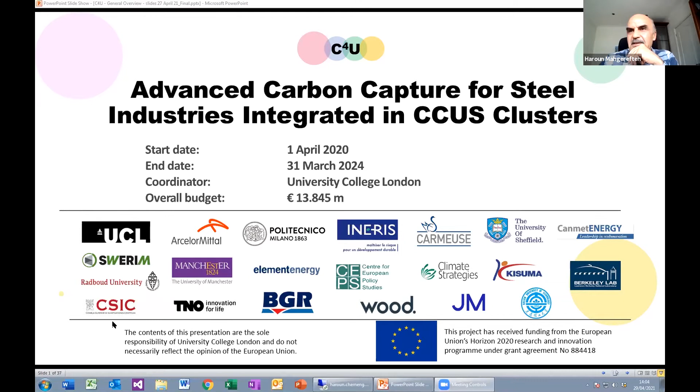So moving on, C4U, the challenge: why is capturing CO2 in the steel industry important? Well, I hope when I finish reading these four bullet points you'll see the reason. First, the iron and steel industry represents the largest energy consuming manufacturing sector in the world, with average specific emissions being 1.83 tons of CO2 per ton of steel. It's remarkable, you produce more CO2 than every ton of steel, almost up to 1.5 to 1.8 times as much. 1.8 gigatons of CO2 were emitted in 2018 from the iron and steel industry, up by 4.6% compared to 2017, accounting for up to 8% of anthropogenic CO2 emissions. That is a huge amount when you think about the total.

So it has been widely recognized that reducing CO2 emissions from the iron and steel making industry is considered to be one of the 5 pillars in meeting the net zero emission target. You have to reduce CO2 emissions from the steel industry in order to have a realistic chance of hitting net zero targets by 2050 or 2030, depending on which country you're dealing with. So it's a question of not putting all your eggs in one basket. You need to pursue, like with COVID, you can't just rely on one vaccine. So you need a range, and much the same goes with capturing CO2 from the steel industry. You've got to pursue different promising capture technologies in order to capture CO2 from the steel industry, and at the same time make sure it is, of course, at minimum cost and energy efficient, whilst also taking on board the socioeconomic barriers.

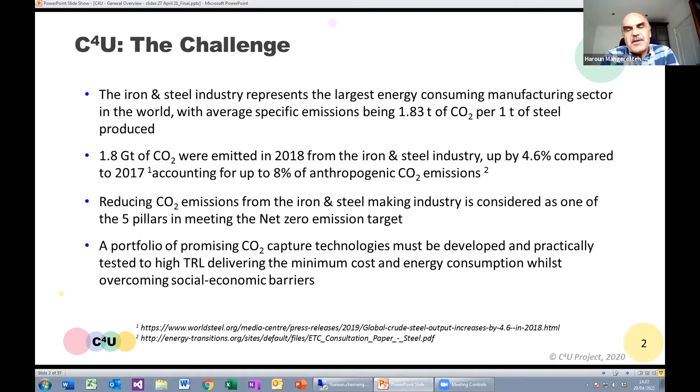So main objectives: as Paul said at the beginning, we have 2 promising capture technologies that have shown quite a bit of promise, and these are both solid-based. We'll hear more about them later. We need to raise these to a high TRL level. They are called DISPLACE and CASOH capture technologies. We need to analyze the environmental and business impacts for the integration of these 2 technologies at large scale in the ArcelorMittal plant in Gent as part of the North Sea Port Industrial Cluster.

So this is where we are focusing on, this is the industrial cluster. We have several industrial emitters, the main one being the ArcelorMittal plant in Gent, and this is where we would like to integrate our capture technologies to this plant.

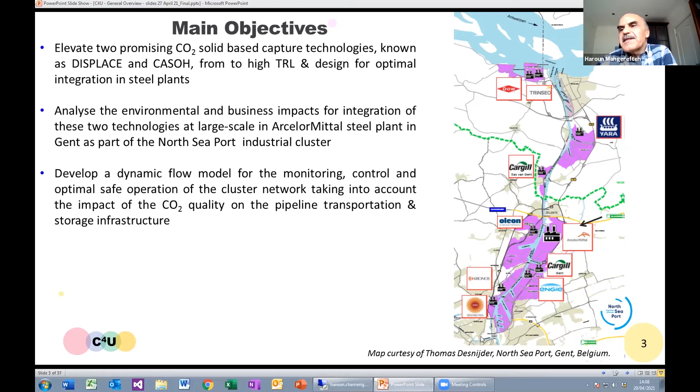As part of this industrial cluster, we need to also develop a dynamic flow model for the monitoring, control, and optimal safe operation of the cluster network, taking into account the CO2 quality impact on the transportation and storage infrastructure. So it's not a standalone situation where we are just considering capture and transport from A to B. We are working in the context of an industrial cluster, using our North Sea Port Industrial Cluster as the main focus of our attention.

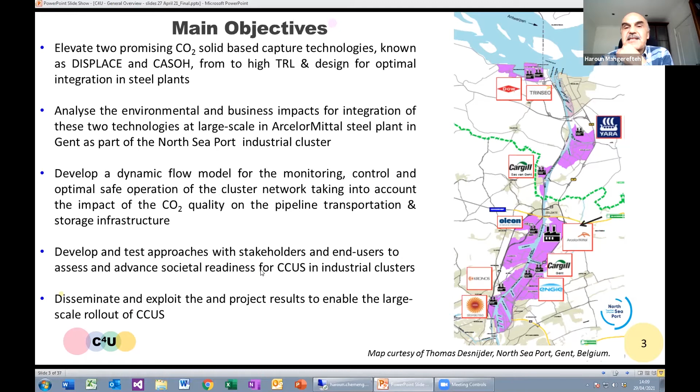We need to test and develop approaches with stakeholders and end users to assess societal readiness for CCUS in industrial clusters. It was one of the main requirements of the call, and if you look at many of the calls coming up for CCS, you've got to have that on board, because if you don't have society on board, then you have problems. And, like many other projects, we disseminate and exploit the project results.

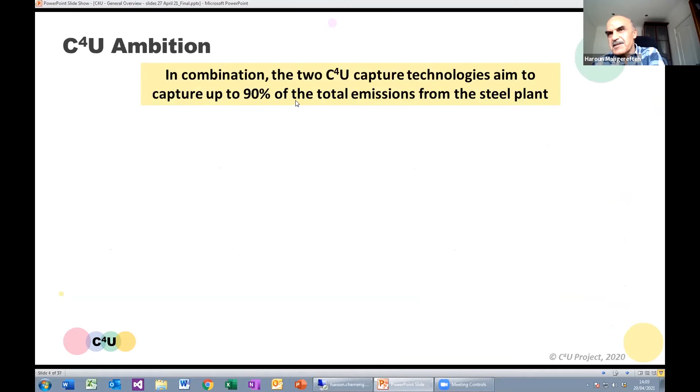What is unique with our 2 technologies is that together they will capture up to 90% of these CO2 emissions, which have different heat values, different compositions, different specifications. With the 2 C4U capture technologies, we hope to capture up to 90% of these, and therefore have a major impact on reducing the CO2 emissions from the steel industry.

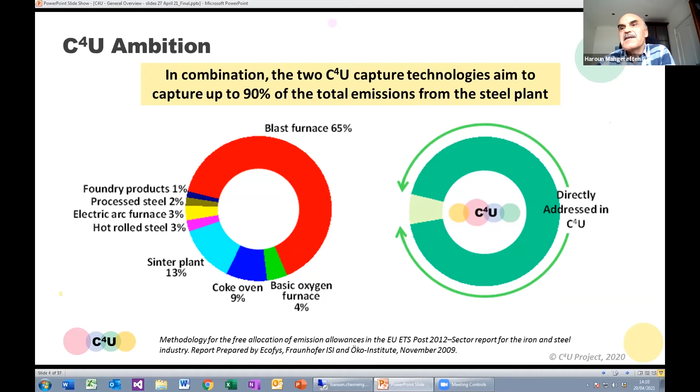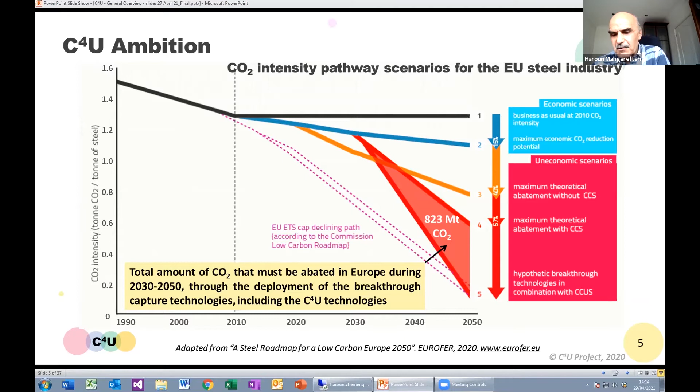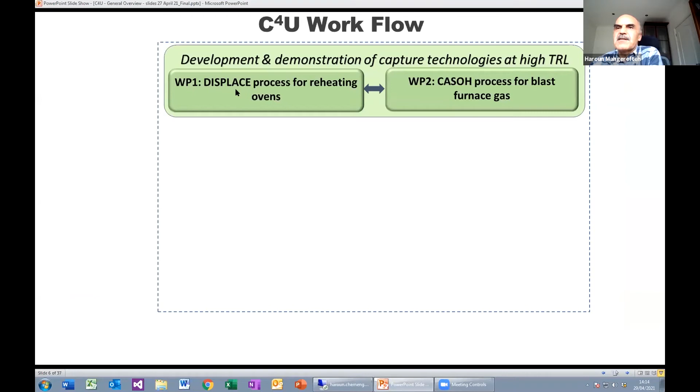Work package 1 and work package 2, the work on elevating the TRL level for the two capture technologies, DISPLACE and CASOH. You'll hear about those more later.

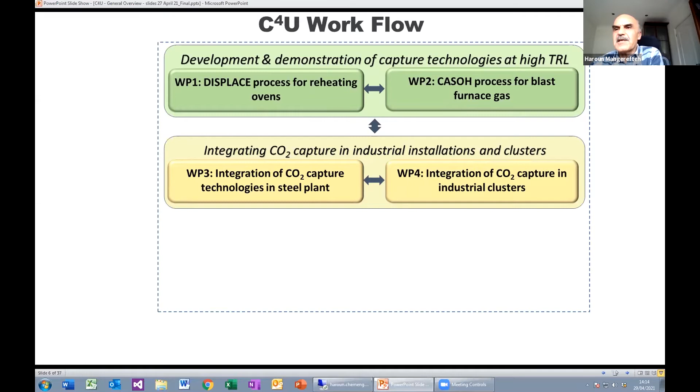In the next work package, we integrate these CO2 capture technologies that we've demonstrated into the steel plant and also in an industrial cluster. Our main focus is the North Seaport Industrial Cluster. And of course, we need to consider societal readiness, public policy, and business case.

So societal readiness and public policy, what needs to be done to make sure that we have public on our side. That's work package 5.

And of course, we need to have appropriate business models to entice business, different models to make sure that we try and make these CCUS clusters commercially viable through the development of different business models.

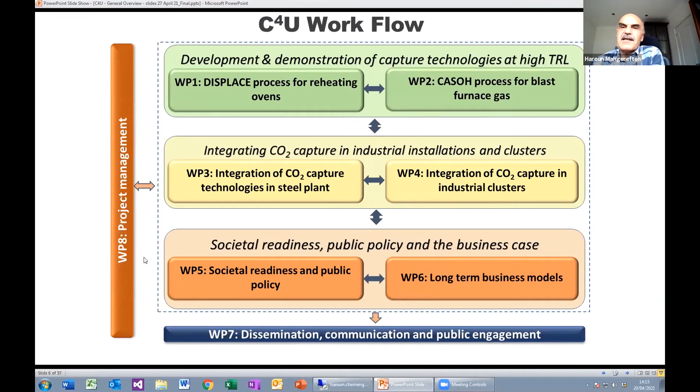And like many of these projects, we need to effectively disseminate and communicate our project results, and work package 8 involves the project management.

I'll now move over to pass to Paul Cobden, where he can talk about the two capture technologies, and I'll take over from him after. Over to you, Paul. Thanks, Haroun.

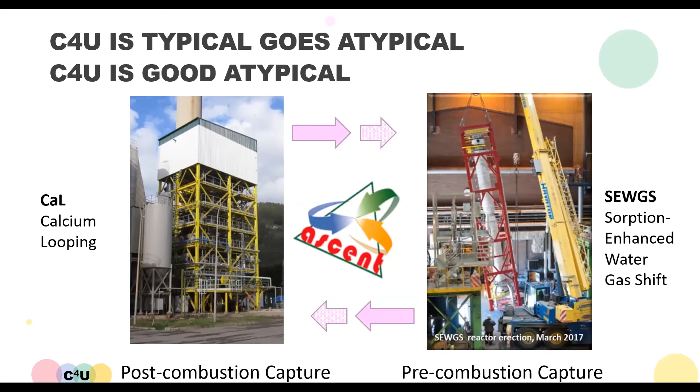If we look at where we're going to be performing these demonstrations, the idea here is because we're asking for high TRL demonstration in the call, we have to be associated with large scale facilities. So in Asturias at the ArcelorMittal plant, we'll be building the CASOH technology, which uses calcium copper as the base material.

4,000 kilometers away, which is where I am, and this is the current temperature profile. So it's quite good today, but it can go up to 1 degree per 100 kilometers in the middle of winter when it gets down to -30 here, and it's still 10 degrees C in Asturias. Today it's 3 degrees in Luleå, and there we're developing the DISPLACE technology.

This is where the blast furnace is, and you see this little line. This is a 2 meter wide diameter pipe taking the blast furnace gas from the blast furnace there, and we have a small port in there taking around about 1,000 normal cubic meters an hour of blast furnace gas to the demonstration site.

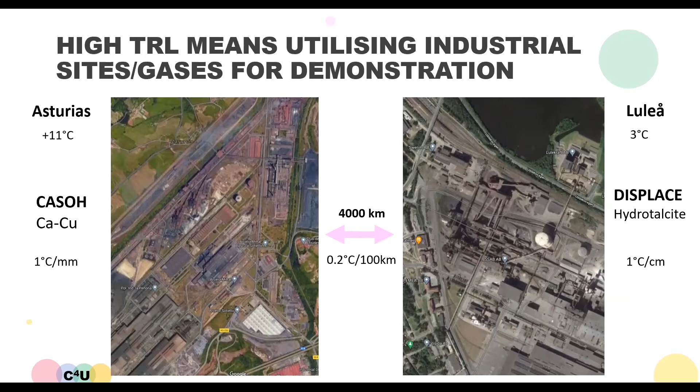And the reason I talked about the temperature gradient is because I think our two technologies are also very much defined by a temperature gradient. In the CASOH process, we're talking about up to 1 degree C per millimeter, and in the hydrotalcite process, it can be more like 1 degree C per centimeter. Of course, a very different scale than the weather phenomena.

So the status of our pilot preparations is we started just over a year ago, and both of the pilots have similar activities. They're both going to show more than 2,000 hours of demonstration at high TRL. And most of the activities of this year are still on engineering, procurement, construction, etc.

Both of the technologies have already delivered on their basis of design. Special attention was paid to equipment delivery, getting everything in on time, the mass balances, the operational philosophy of the pilot, and all of the responsibilities. Unlike some research projects, because we're aiming at a very high TRL level, we can't afford to let anything go wrong.

When we program for a campaign, that means we have to have up to 40 people running around, running the campaign, doing 24/7 work. We can't have the possibility that some material is not delivered and therefore everything will be still. So a lot of extra work compared to a typical research project, where if you don't get a material, you can do something else and you're not relying on tens of other people to run the project. It works in a different way.

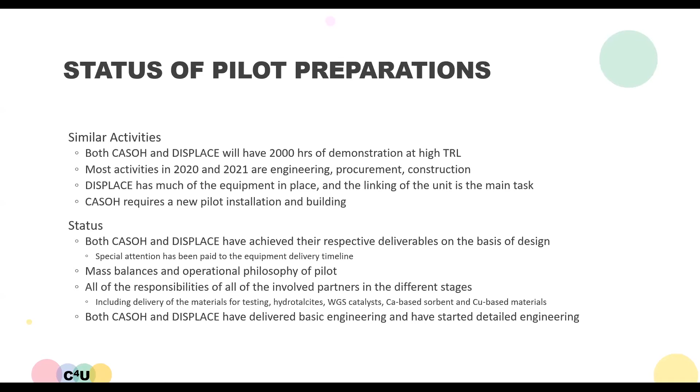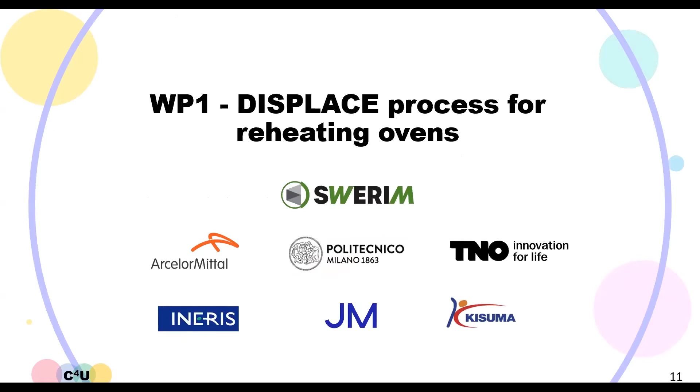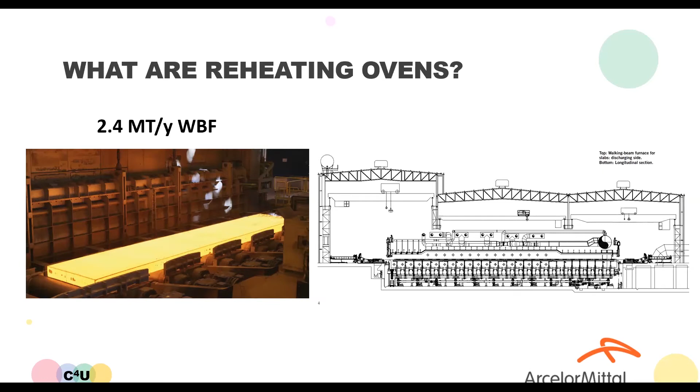It's only about 2 or 3% of the CO2 output of the steel plant, but it's one of those sources that needs to be thought about in terms of how to decarbonize. It can be done in two ways: you can decarbonize the gas that you burn going into the oven, or you could decarbonize the burnt gas with the CO2. So both pre- and post-combustion options are actually going to be looked at in this project.

Here are two much smaller furnaces which are going to do the two 1,000-hour campaigns. On the left-hand side you've got something called a chamber furnace, which typically has 800 kilo samples in it. On the right-hand side you've got a walking beam furnace, which can process up to 3 tons an hour of steel.

The two campaigns are: one in which we use the technology to first decarbonize the CO2, so pre-combustion, and the nitrogen hydrogen is used in oxy-combustion in the furnace for heating the metal. On the right-hand side, in the walking beam furnace, we'll take the blast furnace gas directly, do oxy-combustion on it, and then remove the CO2.

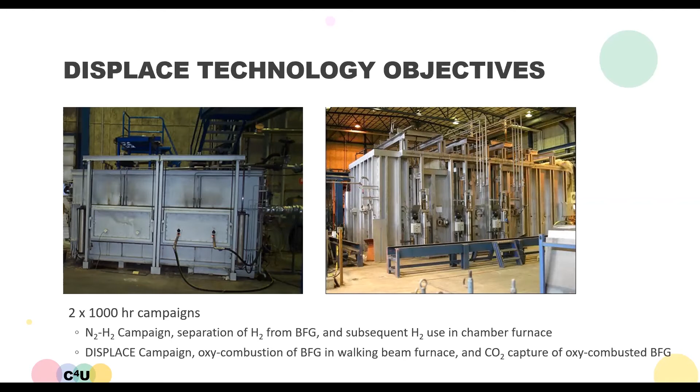The heart of the process is the technology shown here. This is the pilot as it already exists today, with a water gas shift catalyst, which is important for the nitrogen hydrogen campaign. We've got this 10-meter column, about 60 centimeters in diameter, containing up to 3 tons of material, which can be used for CO2 capture both from the nitrogen, the blast furnace gas directly, and also from the combusted blast furnace gas.

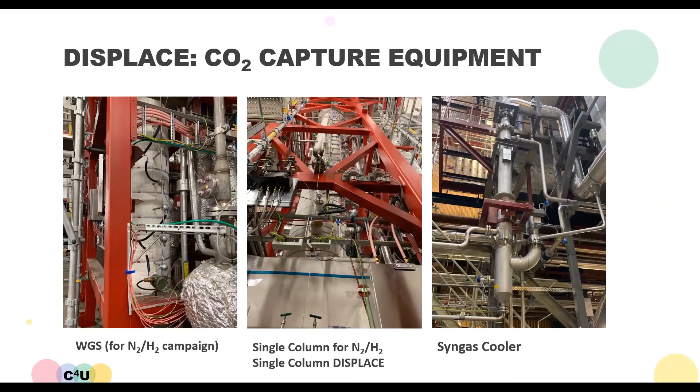So what does the process look like at its heart? This is just for the post-combustion capture. There's oxy-combustion of blast furnace gas in the reheating process, leading to a stream which is led across an adsorption bed at 400 degrees C. Once the hydrotalcite has adsorbed the CO2, the bed is regenerated, with steam at 400 degrees C.

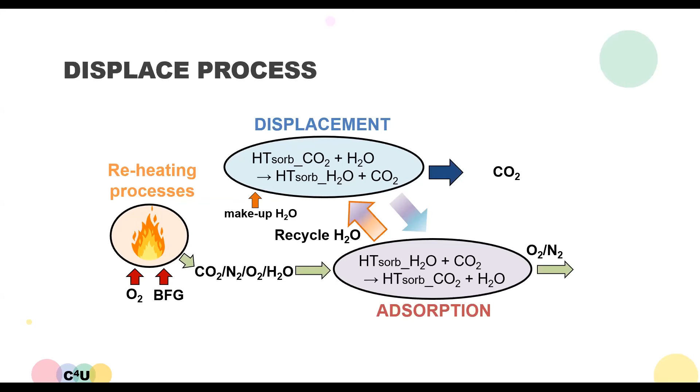The trick here is because there are blocks of CO2 and steam moving through the bed, you can actually reuse some of the steam. So when you regenerate the bed, you push out a block of steam first, which is used to displace the CO2 in another part of the cycle. So there's only a relatively small amount of steam needed to run this cycle, even though the actual amount of steam seems quite large. Because you're reusing the steam, you can really bring down the energy needed for the total CO2 capture.

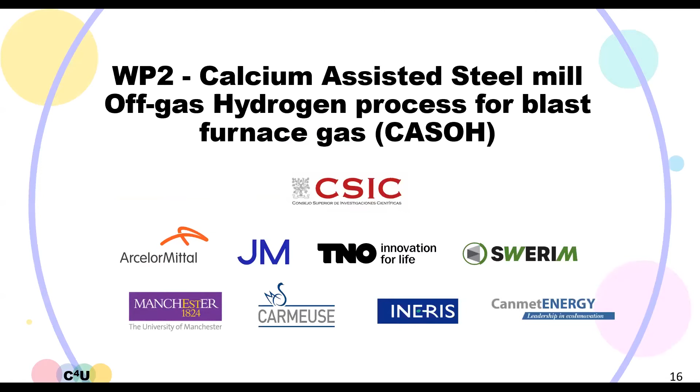Now on to work package 2, the calcium-assisted steel mill off-gas hydrogen process, CASOH. This is very much a pre-combustion process. At the moment, the plans are here for producing the pilot. There's already a lot of things in place, the connection for the blast furnace gas to the technology, the plot has been sorted out, the control rooms have been built, and now the full design of the reactors is taking place.

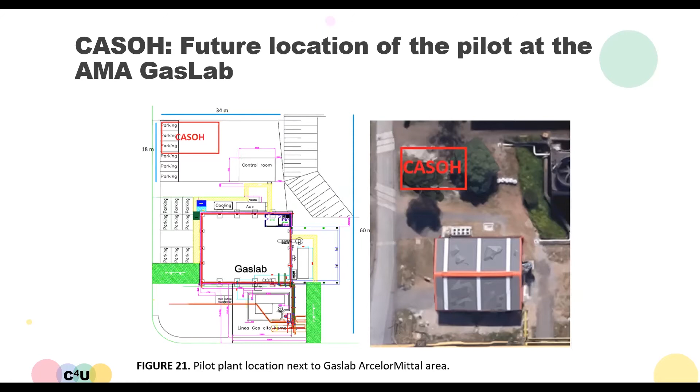Here you see typically the kind of cycle we're running in the CASOH process, which is actually a 3-step process. There's the production of a fuel: blast furnace gas enters into the bed, capture of CO2 from the blast furnace gas occurs along with the water gas shift reaction, so no CO or CO2 leaves the bed, producing a nitrogen hydrogen mix. Then, because you've got this copper material in the bed, you can oxidize that, which is also a heat removal step.

But the oxidation of copper is very mild, so your temperature doesn't increase that much, such that the calcium carbonate is not decomposed. And then you can use a fuel which also supplies hydrogen, and the hydrogen reduction of the copper oxide back to copper actually provides all the heat for regeneration of the CO2.

And of course, included in this, there's various ways of managing the heat between the different cycles, and all that heat can actually be integrated well within a steel plant. So it's a 3-step cycle in essence.

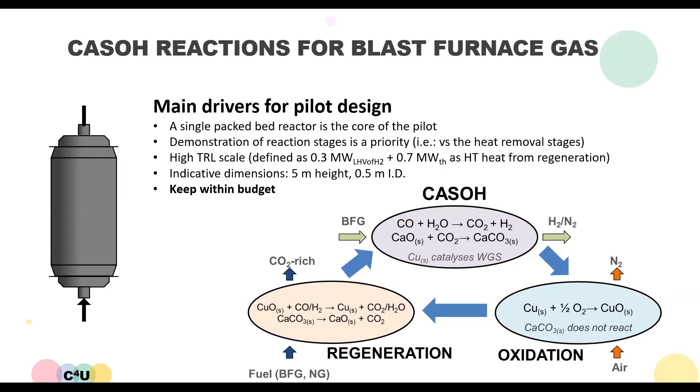The main drivers for the pilot design is that we had to build a single packed bed, a high TRL, which means that the system will have round about 0.3 megawatts of hydrogen LHV it's making, and about 0.7 megawatts of thermal energy from the heat regeneration. And of course, the idea is to keep within budget, which I think is really going to happen.

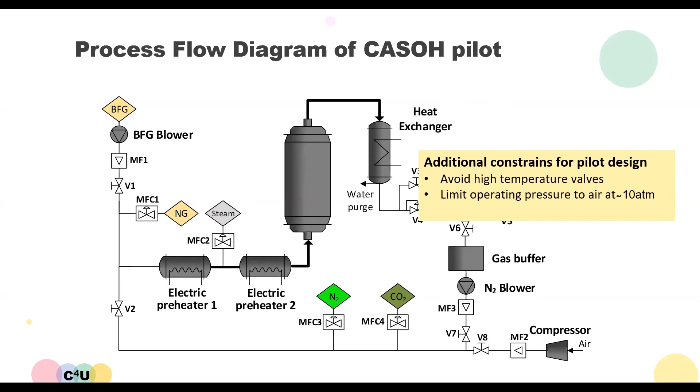If we look at the initial layout, I think we can go through this quite quickly, but the main points here were to avoid high temperature valves and limit the operation pressure to 10 atmospheres.

One of the first deliverables was a common design practice, and this is what I alluded to before. This is about making sure that everybody understands what their role is within the project — a much more detailed plan than you'd ever find in a project proposal. This is exactly because working at such a big scale, you can't take chances in not having something delivered, because then there's too many people that have no work to do or have to do other work. And that's a really important point.

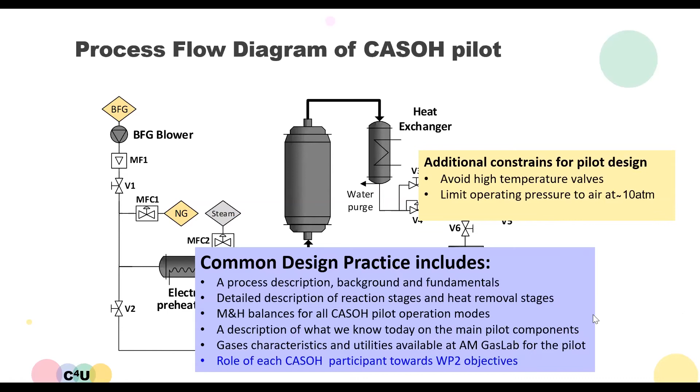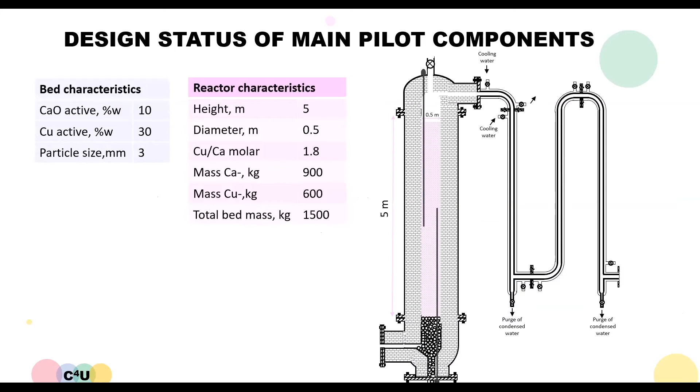I'd just like to show you the reactor as is. It's 5 meters high. The internal diameter is around 0.5 meters. It's filled with calcium oxide and copper active materials provided by CSIC and Johnson Matthey. And already these materials have been tested within facilities that already exist, so it's very well known exactly what's going to go into the packed bed reactors.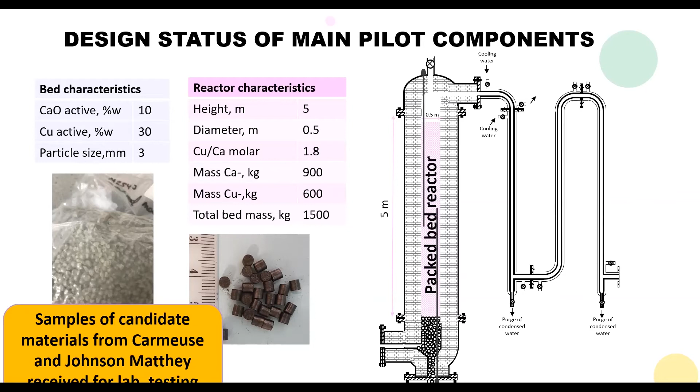So part of work package 3's aims and objectives is to really look at an optimal energy and cost integration of the two different technologies within the steel plant.

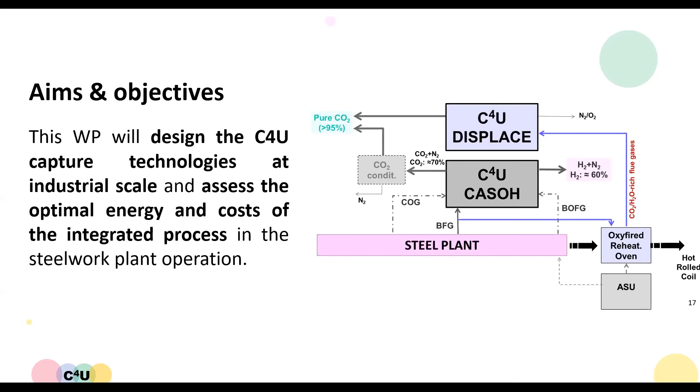One final sheet before we move back to Haroun is what kind of synergies there are between the two different technologies. The CASOH technology can be used to process the coke oven gas, the basic oxygen furnace gas, and the blast furnace gas, and to produce nitrogen and hydrogen as a fuel. These fuels can be used in both the hot stoves and the reheating furnace. But also, when the CASOH technology looks at the blast furnace gas, because there's so much nitrogen in it, it's very difficult to really get a pure CO2.

The DISPLACE technology can be put downstream the CASOH to upgrade the CO2. And of course, the DISPLACE technology can be used in all types of oxidative media. And with that, I'd very much like to switch back to Haroun.

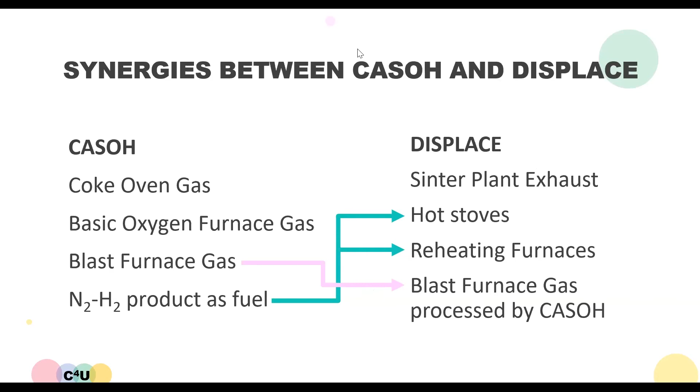Okay, thank you Paul, over to me. I'm a bit anxious of time, so please forgive me if I go too fast — hopefully we'll have some time for questions. Don't worry Haroun, we often spill over. Okay, very good, thank you. Do your best, but don't worry too much. I'll do my best. Thank you, Paul, again — I definitely could have never done such a good job as you did, so I'm glad that you took over on the description of the capture technologies.

Now, moving on to the next step, we wish to integrate the capture technology into the steel plant, and next in the context of an industrial cluster. So we want to integrate the integrated capture unit into an industrial cluster, and work package 4 deals with that.

So let's put things into perspective. At 60 megatons per annum, the industrial activities of the three industrial port areas of Ghent, Antwerp, and Rotterdam account for up to one-third of the total CO2 emissions of Belgium and the Netherlands combined.

Clustering of these three regions with a common CO2 transportation infrastructure will allow the geological storage of up to 10 million tons of CO2 per annum in depleted gas fields in the Dutch coast, making it one of the largest CCUS clusters of its kind in the world.

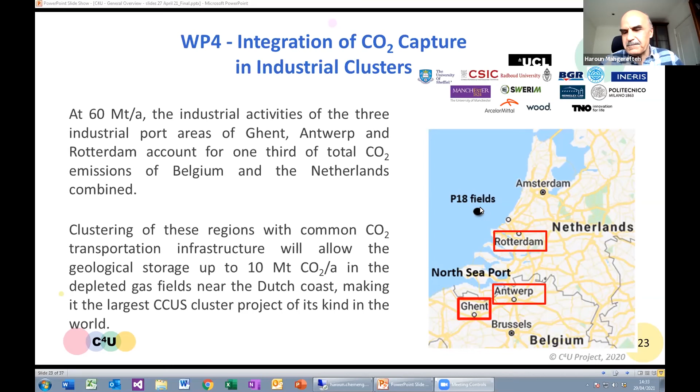Work Package 4 aims and objectives: to develop a multi-source dynamic flow model along with realistic scale experimentation for the optimal control and operation of the North Sea Port Industrial Cluster, taking into account the impact of CO2 quality on associated pipeline transportation and storage safety, and also investigate utilization opportunities, employing the CO2 capture cost models developed in Work Package 3, along with agent-based models to assess capture, energy, and cost penalties for the North Sea Port Cluster for 2030 and 2050 decarbonisation scenarios.

We appreciate that you need to look into the future when designing such clusters, to make sure you have sufficient capacity and are able to deal with changes in the landscape, such as the replacement of emission technologies with more renewable technologies. There may be changes and reductions in the total amount of CO2 permitted from each emitter, so you need to think ahead and consider these scenarios.

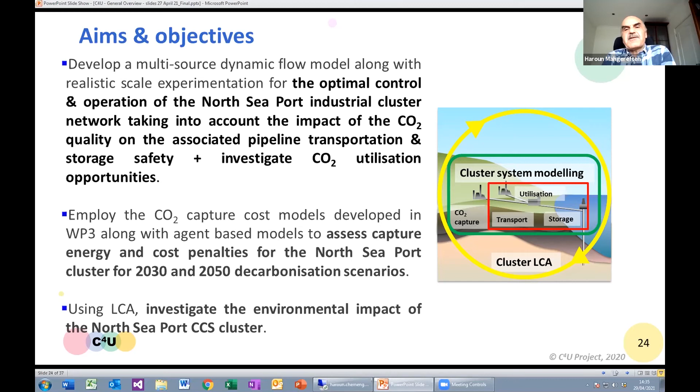So we are also looking at how things will look in 2050 in the design and operation of our cluster. And of course, we need to look at the environmental impact of the North Sea Port CCS cluster using life cycle analysis. Our main focus of attention, as I mentioned, is the North Sea Port Industrial Cluster.

The ArcelorMittal plant is shown here near Ghent. As you can see, there are several different emission sources along this path. Ultimately, there are plans to connect all these to a common pipeline network infrastructure for transport further up into the port of Rotterdam, and also ultimately for storage offshore.

The range of different emitters is quite diverse. We have fertilizer plants, starch manufacturing, renewable plastics, titanium dioxide production, power plants, the list goes on. So there are several very diverse sources producing different amounts of CO2. This is based on data we were able to obtain in 2017. As you see, the focus in the C4U project is the ArcelorMittal plant in Ghent, which is the highest emitter at 4.11 million tons per year.

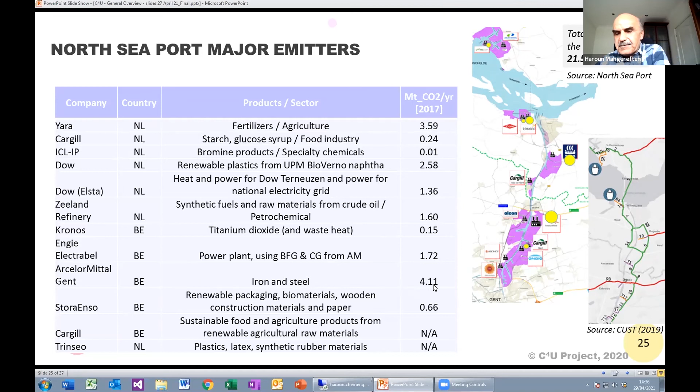Now, the monitoring and optimal control of such a complex network presents several challenges. Some emission sources may have relatively low purity CO2 and low flow rate. Other emission sources may have relatively high CO2 purity and high flow rate. There will also likely be temporal variations in the feed flow rate. You can imagine a situation where a source is continuously emitting CO2 into the network because of its nature of operation, and other sources which may dispose more CO2 during daytime as compared to nighttime.

Another problem is that impurities tolerated in the pipeline may not be tolerated at the storage site. On top of it all, a relatively stable flow of constant purity CO2 is required at the injection site. So you have several challenges. Where do you draw the line? You've got an emitter producing low quality CO2 at high flow rate, and another doing the opposite. What kind of purity specification can you impose so that you have a balanced flow through the main trunk line, meeting the storage specification?

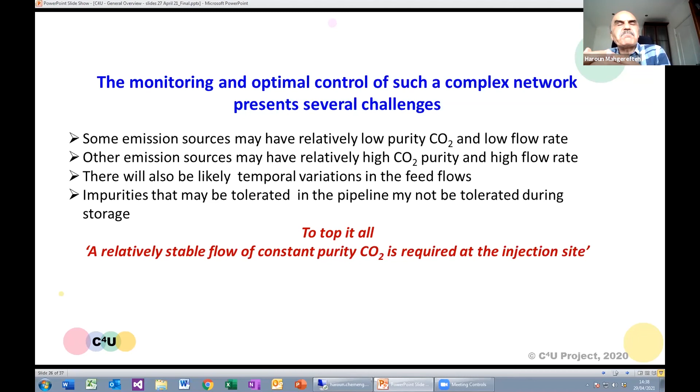To do that, you need to understand exactly what goes on in terms of purity and flows in the entire network. This is where we come in, in Work Package 4. We are developing a multi-source flow model where we can simulate exactly what goes on at any point, at any time throughout this pipeline network infrastructure, as a function of different CO2 impurities and flow rates. By simulating this, we can understand what goes on and track the CO2 composition at any point, at any time throughout the network.

Based on that capability, we have an effective control role where we can monitor and control the entire system, so that we can stipulate the degree of purification required from each emitter, taking into account how the emission rate changes with time, as well as the flow rate and purity.

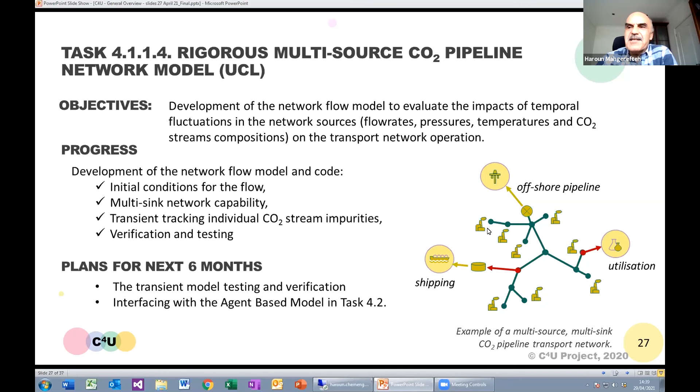The ultimate aim is to have that kind of capability for understanding the dynamics of the flow in the model. Now, one of the main aspects of this work is basically experimentation.

Safety is a major issue. If, for example, you have a rupture of the pipeline, you need to see what the dispersion behavior of the CO2 is. During flow, are you going to end up with multi-phase flow or single-phase flow, depending on the CO2 specification? You cannot predict these theoretically without the confidence of having experiments to back up the theory.

Part of our project here is the utilization of a pipeline that we developed through a previous FP7 project in collaboration with China. It's the largest experimental test pipeline in the world for conducting CO2 release experiments, 256 meters long, heavily instrumented, so we can find out exactly what the temperature and pressure variations are along the length of the pipeline.

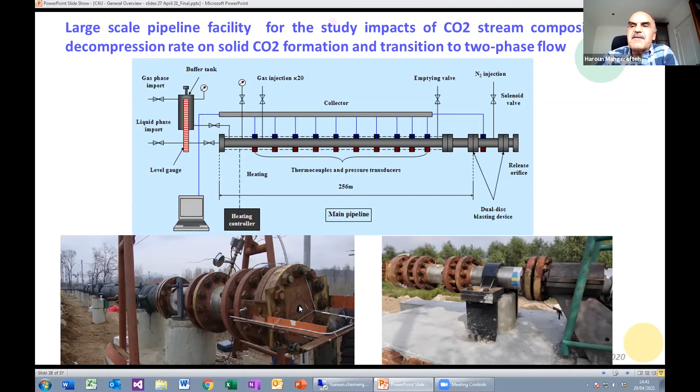We pressurize it with CO2 with different types of impurities that we are likely to encounter. We rupture it and we look at the flow behavior. So these are the two diagrams: we can do both puncture experiments, where we can control and simulate a puncture in the pipeline, as well as a full bore rupture.

I'm going to show you a brief aerial video of the pipeline system that we constructed in China. It speaks for itself. This is the entire length of the pipeline. We have temperature and pressure monitors along the length of the pipeline throughout.

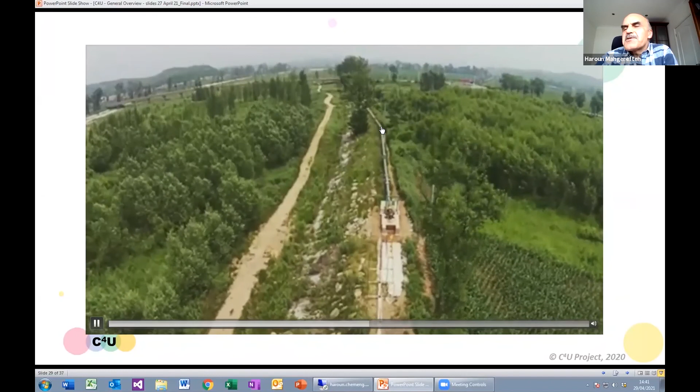This is the point of release. We pressurize the pipeline with different CO2 compositions. We can do both rupture and puncture experiments, measure the concentration of the CO2 plume as a function of distance, find out if you have two-phase flow taking place along the length of the pipeline, and also work out safe distances from the pipeline depending on the particular pressure, temperature, and composition we are likely to encounter.

Work package 5, societal readiness and public policy aims and objectives, led by Radboud University in collaboration with Element Energy and CEPS. We generate public support for CCUS through identifying concerns through informed dialogue, constructing narratives that address public concerns, and increasing the feasibility of large-scale CCUS clusters through identifying and analyzing policy options that address public concerns.

As I said, many of these projects have failed because of poor public consultation. If you don't have the public and society on your side, then you run into problems. So throughout the C4U project, it is a major work package where we look at the societal aspects.

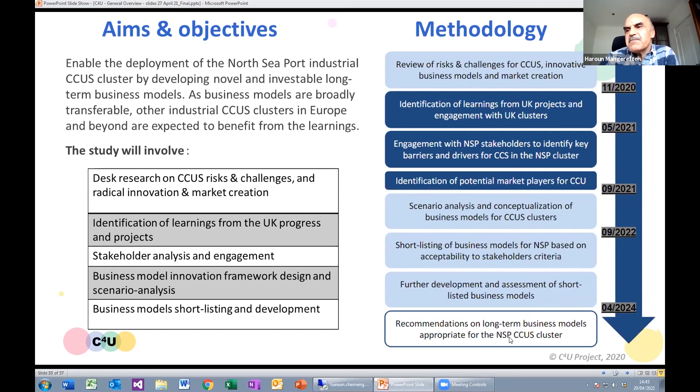And here is the methodology from the commencement of the project until its termination, where we end up with recommendations on long-term business models appropriate for the North Sea Port CCUS industrial cluster.

Dissemination through knowledge sharing and public engagement involves everyone in the project, led by Climate Strategies, aims and objectives, ongoing throughout the project, and ensures that the project results are exploited to the full extent and disseminated to relevant stakeholders to facilitate the large-scale rollout of CCUS.

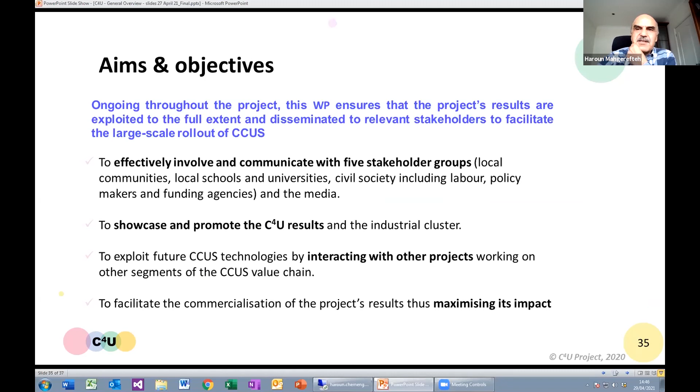I'll skip to the next slide here, which captures the previous one. This is the breakdown of our dissemination activities. The first thing we had to do is develop the PEDR document - Dissemination and Exploitation of Results. It's a live document that we constantly update and embodies the different activities that will take place in terms of disseminating project results.

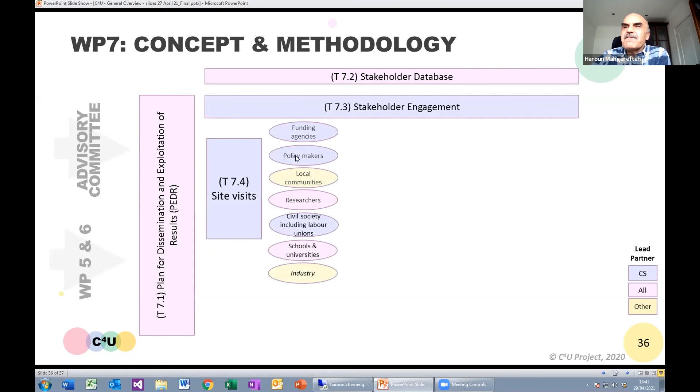The first activity embodies stakeholder database, stakeholder engagement, site visits, which includes funding agencies, policymakers, local communities, researchers, civil society and labor unions, schools and universities, and industries, co-creation technical workshops, international conferences, and the final commercial exploitation event, where we exhibit the technologies we developed, with a workshop dedicated to exploring commercialization opportunities.

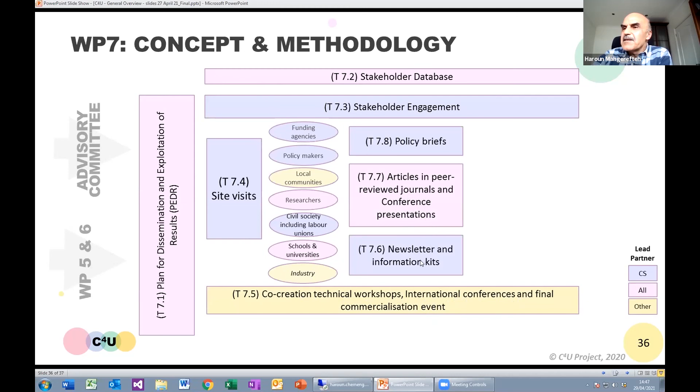Policy briefs, articles in peer-reviewed journals and conference presentations, and newsletter kits, collaboration with other CCUS projects - very important, as there are several projects going on at the moment looking at CCUS clusters - website development, and social media channels and other media outreach. Many of these activities go on at the same time, so the fact that I'm clicking on each one doesn't mean they appear consecutively; several take place simultaneously.

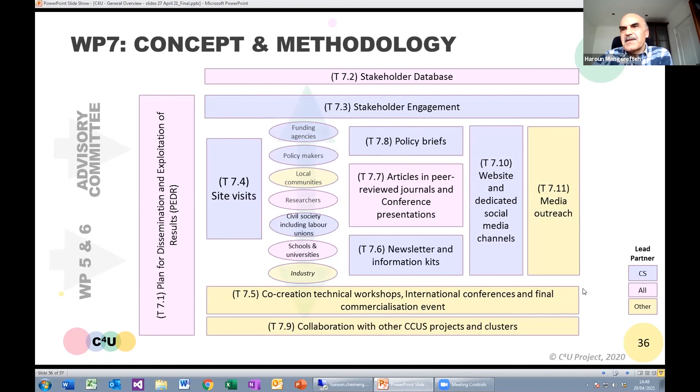And here is a distribution of the workload. So that's it, I'll stop here. Any questions?

Well, I don't say that'll be the main takeaway from this lecture, but it could be significant nonetheless. Well, we're running on. Anything else you want to say, Paul or Haroun? Oh, well, I think it's... Thank you, Paul, and thank you for your attention.

There are several aspects to this project, and the message I hope I put across is that you need a holistic approach. You can't just focus on a particular aspect of CCS without considering its impact on the rest. Any project to do with CCS, you need to look at the entire chain, not just the technology, but also the business aspects and the societal readiness.